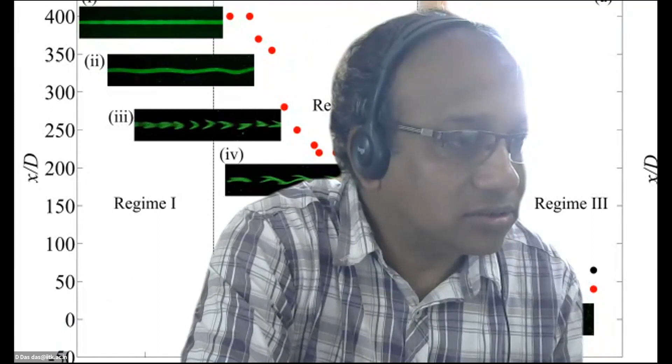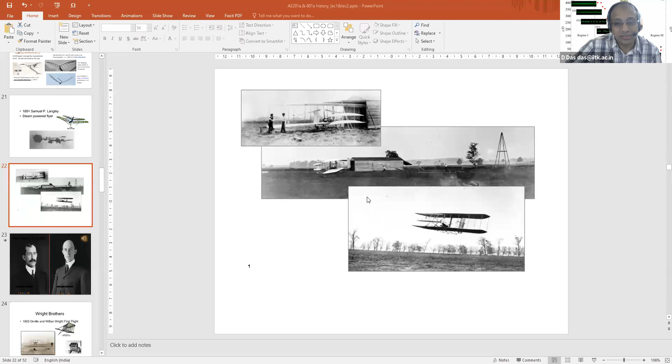Okay, so if you see, they had a cycle shop, and after that they started working on this aircraft. This is the Wright brothers, and we all know they are considered the pioneers in terms of flying with human beings. So the first flight with the engine, with their gliders, is this picture that you see.

But the story behind the Wright brothers is very encouraging, and this is why I tell this story, and this is where I think the motivation should come when you are trying to do something new or challenging. They had just a cycle shop, but they started this design of aircraft based on the theory of Lilienthal and Langley. Before 1800, inviscid theory was developed quite substantially, and based on that you could estimate the lift generated by an aerofoil. They used those theories and developed their first model.

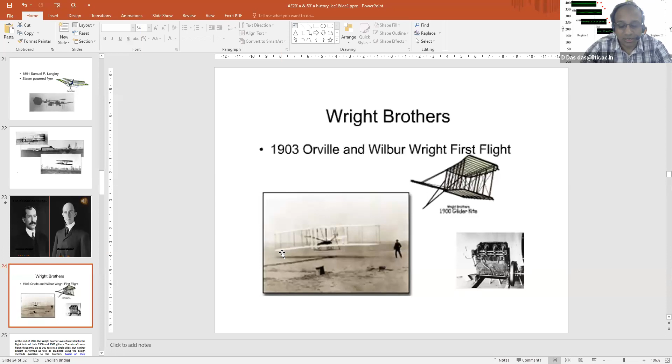And in 1901 they were so frustrated when they did their first flight, and they saw that the actual lift they are getting is one-third of the lift that they predicted using the Lilienthal data. They were so frustrated, they failed in their test. They thought they would fly, but while returning to Dayton, they said that in 1,000 years nobody is going to fly. That is the Wright brothers' statement.

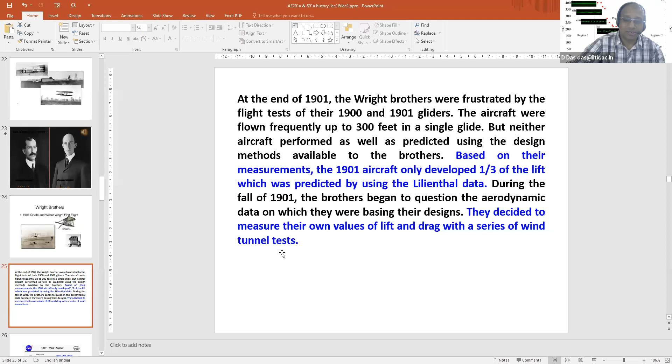So they themselves said in 1901 that in 1,000 years nobody is going to fly, but they did not leave it there. They came back and said, okay, let us find out what is wrong with the model we have made. So they built a wind tunnel — a very elementary wind tunnel compared to today's wind tunnels.

It has a fan and a test section, and you can see that they mount the model using these things. Can somebody guess how many models they tested in one year's time, because they flew successfully after one year?

50. Okay, in one year, 365 days, 50. Anybody? Any other guess? That's a reasonable guess at least. 100. If somebody is very efficient today also, when you make a model and test it, you will see how much time it takes for one model.

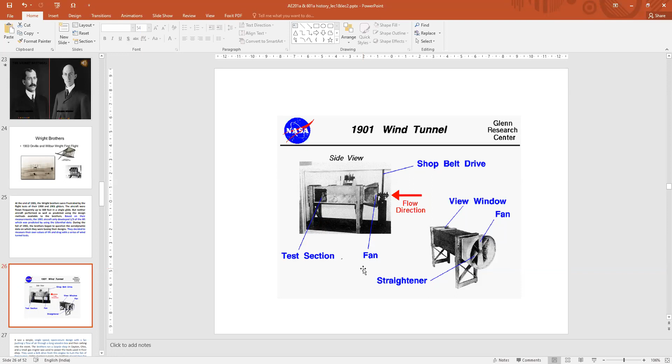So in this period, they made about 200 plus models in 365 days and tested those models, and they figured out what the problem was.

But at that time, in 1901 — today you get all modern instruments, you put the model, you put a force transducer inside it, and it gives you all three components of forces and moments, so you can measure how much lift this wing is generating. That time they did not have this kind of transducer available, nothing available. So what they had was their cycle shop.

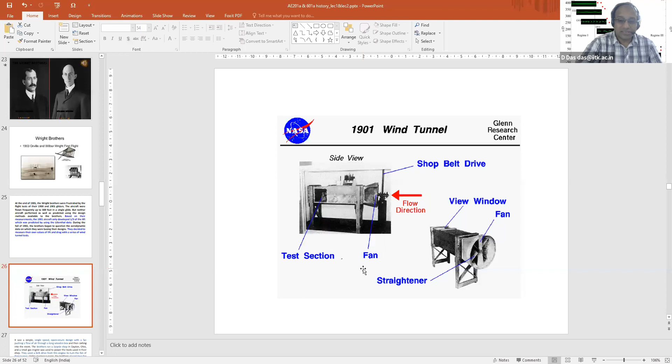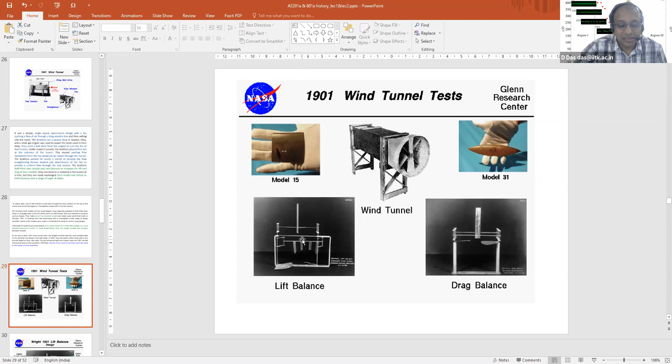So what they did — I'm not going to read this, you can read it later — they created a balance based on this, using cycle spokes and different weights. You have all seen balances in shops; today you see digital balances, but even today if you go to market in the sabjiwalas, you will be using the conventional balance. They created the balance to measure both lift and drag using cycle spokes and other links they created.

This is the balance they used to mount the model, and they measured the lift and drag — you can see there is a dial through which they could measure it. So they created that first, and then tested. Within that one year they tested about 200 models, and figured out what was the problem in their model. Can anybody guess what they figured out was the problem?

You should read a bit of the history of aerospace, because that gives a lot of motivation. In Anderson's book, you will see many historical notes available. And today with Google, you can actually find lots of things that were difficult to find in earlier days when we were students, but today you have a lot of access, so you can read and you will see many interesting stories.

The primary thing they figured out is that the model they were using had a span that was small compared to what they should have taken for the chord of the aerofoil they considered. So they had to increase that aspect ratio, that is length by chord, and they realized that the aspect ratio they were using was not producing sufficient lift. Whereas if they used a longer aspect ratio, they would produce sufficient lift.

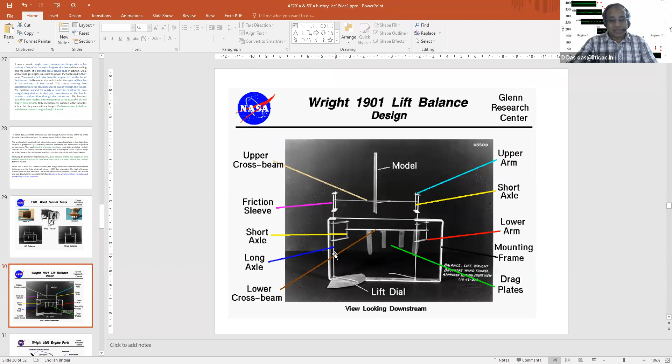And finally, with that, within one year -- after people predicted that for a thousand years nobody was going to fly, because of the effort they had put in and it did not fly -- within one year they could fly their model. So they built the engine and other things, everything. You can go and see the details. This is their flying, and this thing.

So from this story, you understand the failure that they had and the effort they put in. After the failure, if they had just left it and gone back to their cycle shop, that would have been it, but it was still there in their mind, and they built it successfully. That's why they are in history today as the pioneers of the aeroplane, of modern-day aeroplanes.

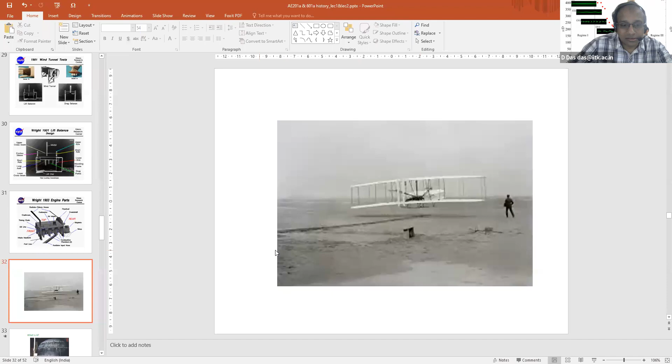Okay, I'll just skip this right now. When we come to other things, we'll talk about it.

Modern day aeroplane looks much different than what the Wright brothers started with. When we talk about this aeroplane, we have to talk about why this wing is there, and how this wing generates the lift and thrust.

To start this, we need some basic background of aerodynamics, and that's what we'll be talking about next. So how many of you have done any course on aerodynamics, or are you doing the aerodynamics course right now?

No sir, this is our first introduction. We are doing a fluids dynamics course. Oh okay, you are doing the fluid ESO 204 course, that is the fluid dynamics course. Yes sir, okay, okay, yes. So right now you are doing the fluid dynamics course.

So I am sure some of this introduction that I am going to talk about today, because I am not going to talk in very detail, is just related to fluid dynamics. And once we do that, then...

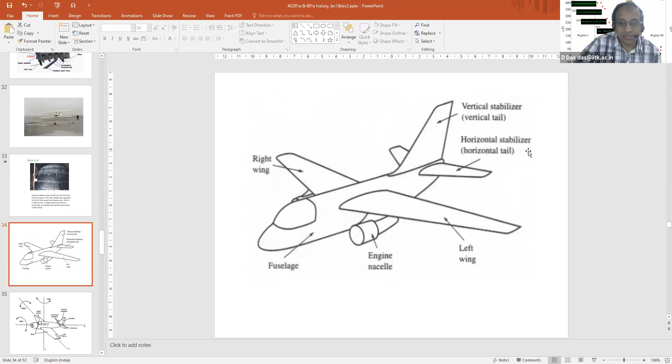What are these forces, how are these forces generated. There is a pitching motion, rolling motion, and yawing motion. So the aircraft can roll with respect to this axis. It can pitch, nose down and nose up, that is the pitching motion. And it can also rotate in a horizontal plane, that's the yawing motion.

Then how wings and different control surfaces generate forces. All these things will be clearer once you have some fluid dynamics background, which I don't know how much is covered. So I will quickly go through some background so I can explain all this in detail. So today's class will continue with that background.

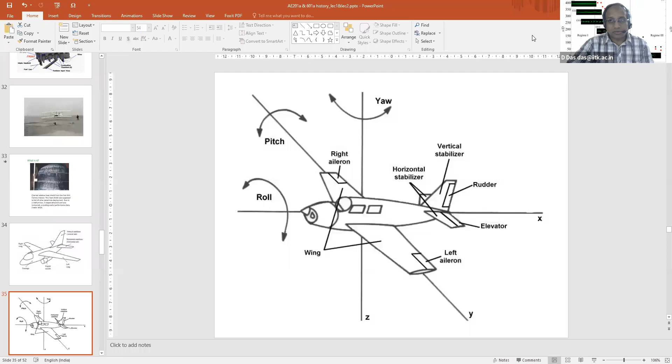I'm sure when we are talking about aerodynamics or fluid dynamics, we need to talk about what is fluid and how do you define this. Because if I start looking at air as a gas, you may think we should start analyzing this using each molecule of the gas, at the molecular level.

Now, I think the first thing we should understand is how do you define a fluid particle, in the sense when you are saying velocity at a point, or pressure at a point on any surface, what does it mean? Or when you talk about density at a point - because we are aerodynamics people, we have to think about density-changing flow also, because at very high speed, high Mach numbers, density variations become important. So we need to define what is continuum and how we define a fluid particle.

So to do that - this has probably already been discussed in the fluid dynamics course. And if you... Yes sir, yes sir. Okay, so if it has been discussed, then I will discuss it very briefly and quickly.

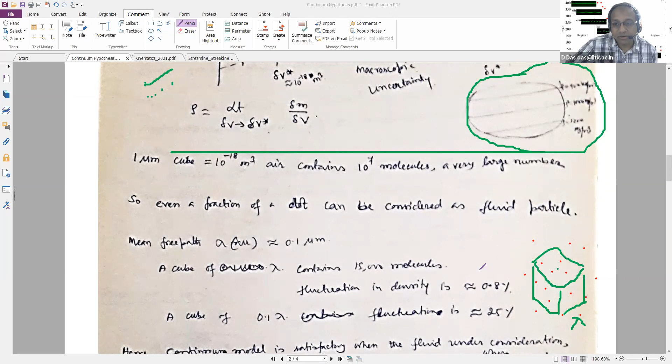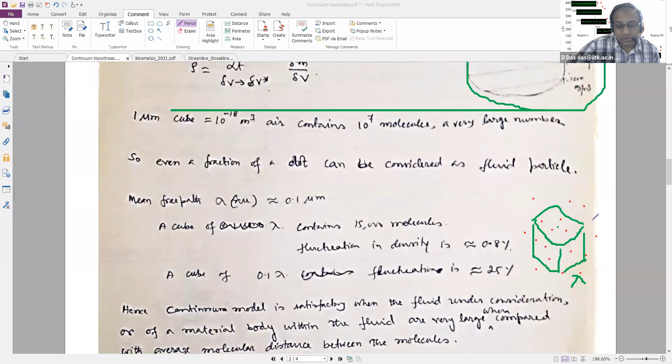So if we now start thinking of the probability of number of molecules present in any of these volumes we are considering, the probability that the number of molecules present in this, or coming in and going out from this volume, that is what will determine how many molecules are present here. So if I take a lambda cube, the probability of the number of molecules going out of this volume and the number coming inside this volume is almost the same. And as a result, this lambda cube is actually your delta V star. Your delta V star is not this, delta V star is lambda cube.

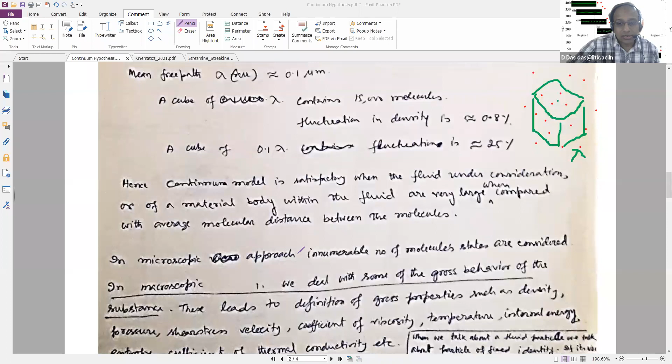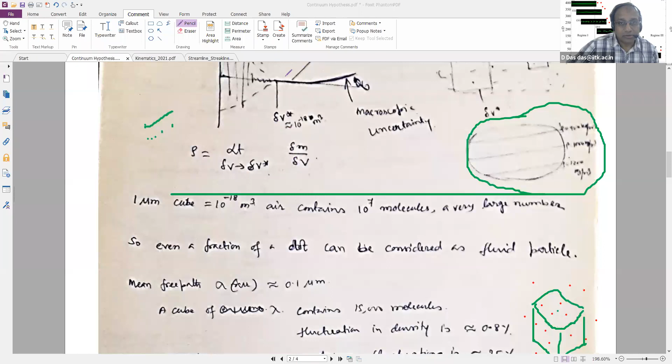That is what is important, this is the minimum volume that if you consider, then you will be in the macroscopic zone. So with this macroscopic zone, now we have defined a small volume which is lambda cube, or maybe more than lambda cube, but it is still sufficiently small so that I can take a tip of a pen or tip of a point, and I can say that I can define all the fluid properties there in the macroscopic sense. So the entire analysis that we do, most of these studies in our aerospace, is in the macroscopic zone.

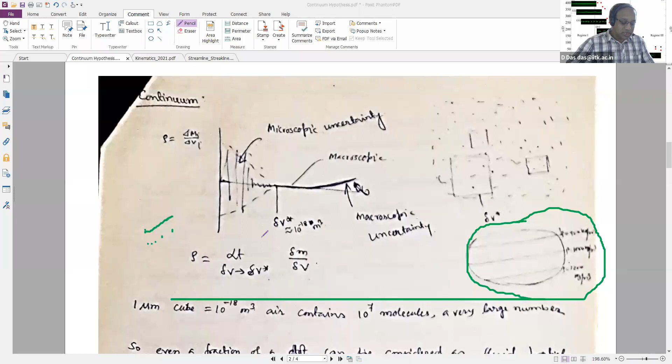But if you go to the outer atmosphere or upper atmosphere where the air is very thin, your spacecraft dimension may be of the order of the mean free path. In that case, you have to do molecular simulation, not in the macroscopic sense, whatever we do. So in that case, you have to use either kinetic theory of gas or molecular level simulation to understand what is happening in the flow.

But once we are in the macroscopic region, delta V star is still sufficiently small. So I can take one point and an adjacent point - this is a large view - and I can define the properties at every point in this space, and join them into a continuous function like this. I can say this property rho is a function of space, as well as it can be a function of time at any point. That is why we can apply the properties of continuous function in the continuum model.

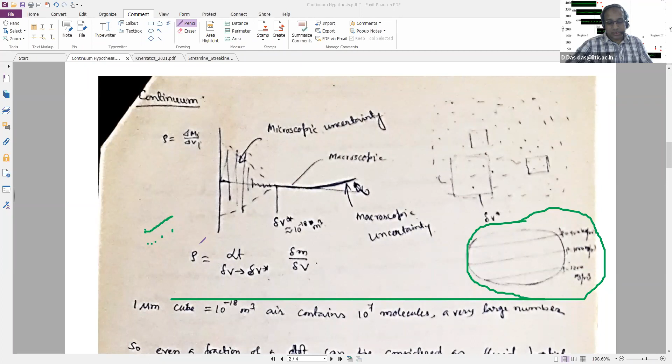And this is what we will be doing in the entire macroscopic analysis - using these properties of continuous function, and that's why we call it continuum. Similarly, we can define the velocity of a fluid particle, so velocity will be defined as momentum by mass.

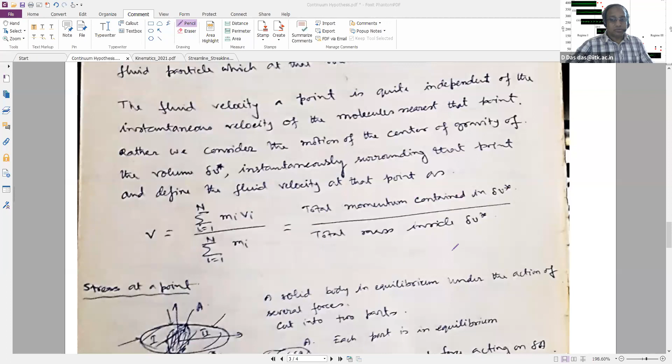So total momentum of the molecules contained in delta V star, by total mass of the molecules present in that volume, we can define stress similarly.

Stress is defined as force per unit area. So you can define delta F by delta A, where delta A tends to delta A star, is defined as a stress.

In fluid, in aerodynamics or fluid dynamics, whenever we are talking about stress, usually we decompose into two components: one normal to the surface, and another tangential to the surface. So tangential stress is tau, and normal stress, when we write it, we write it as sigma, usually, or sigma n, whatever.

The direction of that normal stress is always the outward normal to the surface, because any surface or area is actually a vector. It has a magnitude and a direction, and the direction of that area is its outward normal. So normal stress will be outward normal, and normal to the surface.

But whenever we say pressure, pressure is actually opposite to the normal stress. It is inward to the surface. So this nomenclature you should be familiar with: pressure always acts toward the surface. The convention for stress is that it acts normal to the surface for the normal component, and tangential will be in the tangential direction.

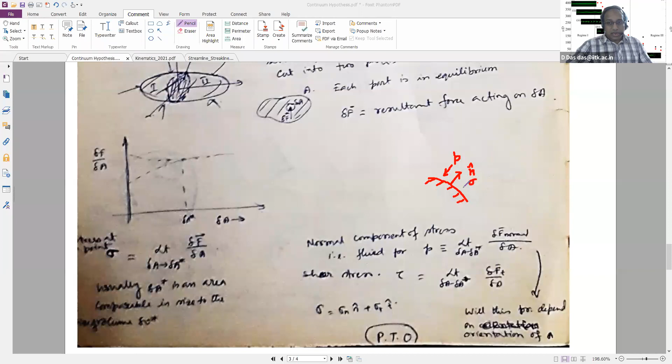Now we have to also define fluid, and you can define fluid how? Air is also a fluid, remember. Air, all liquids and gases are considered fluid. So if I consider a solid object, let's say in class I would have taken a chalk...

and if I twisted it, applied a torque, it would have some internal strain or deformation, and then reach an equilibrium position depending on the torque. If it were a chalk, and I increased the torque, at some point it would have yielded, then ruptured, the chalk would break.

But up to a certain torque it will withstand, and when withstanding this torque, it reaches another equilibrium by developing some internal strain, because the torque is applied, and stress is proportional to strain, as we know in the case of a solid.

The difference between solid and fluid is this: let's say I have this arrangement. This is a rotating drum on a table which is rotating at some RPM, and this is a fixed cylinder immersed into it. Now when I rotate it, what will happen?

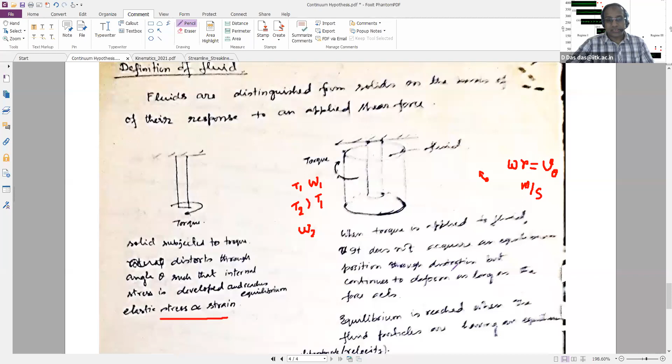So under shear, it will start deforming and reach an equilibrium state such that the rate of strain is proportional to stress. That's the difference between fluid and solid, where rate of deformation is important in a fluid.

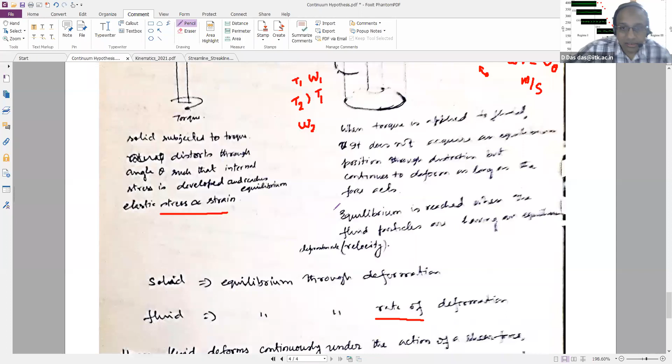So in this fluid mechanics course, you will learn that stress is proportional to strain in a solid, while in a fluid it is proportional to strain rate. So today we have defined a fluid particle, and we have defined what fluid is.

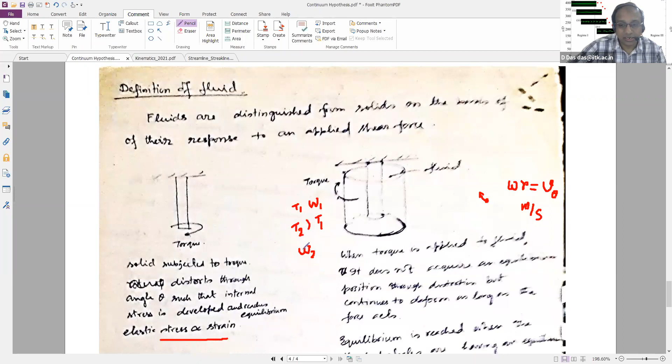in comparison with what is solid, and we have said what is fluid. So otherwise we say fluid is any gas or liquid, but in terms of the property, in terms of stress and strain, you see a stress-strain rate equilibrium in the case of a fluid.

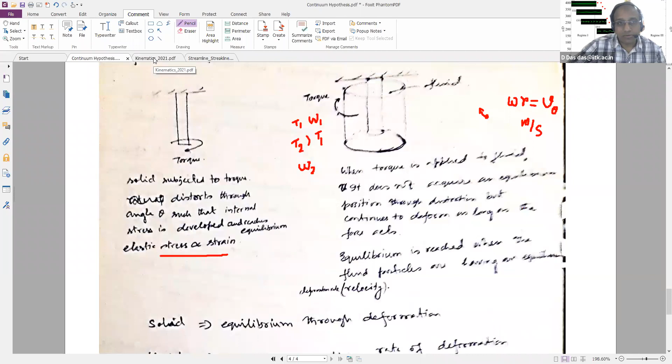Okay, so now once we know fluid, let me just quickly talk about kinematics. So can somebody tell me what is the difference between kinematics and dynamics?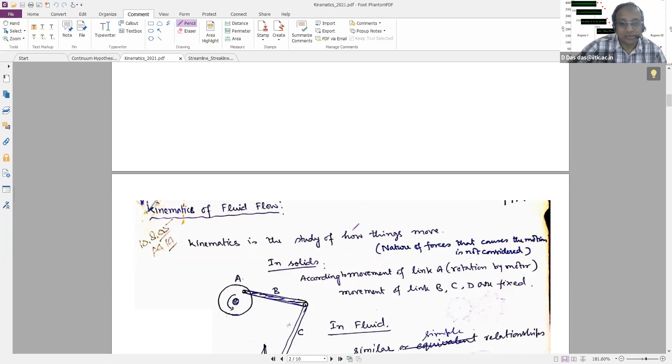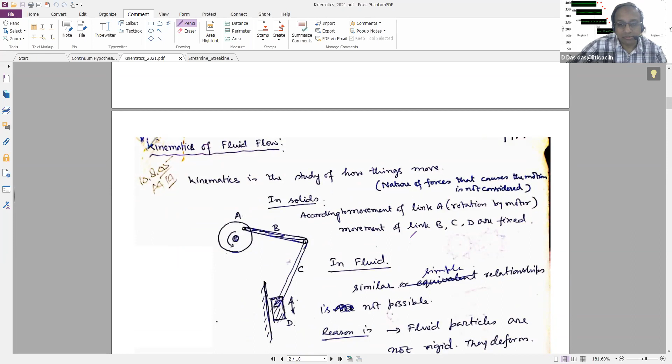Dynamics studies the cause of motion, while kinematics studies motion itself. Kinematics is the study of how things move, the study of motion. When we try to answer why it is moving, the nature of forces causing the motion, then it is dynamics. So kinematics means we are talking about displacement, velocity, acceleration - these are motion related quantities. Whereas dynamics means the force that is acting, force equals mass into acceleration - that is dynamics.

I'll go through this very quickly. When you consider solids, this probably has been taught. If I consider this slider crank mechanism and rotate this wheel with some motor, depending on these links, I will get an amplitude and frequency. The frequency will be similar to the rotational frequency of the motor, and I can generate a sliding oscillating block D using this mechanism. How much this oscillates depends on the link lengths, and the frequency of oscillation depends on the rotational frequency. So we can determine this very easily.

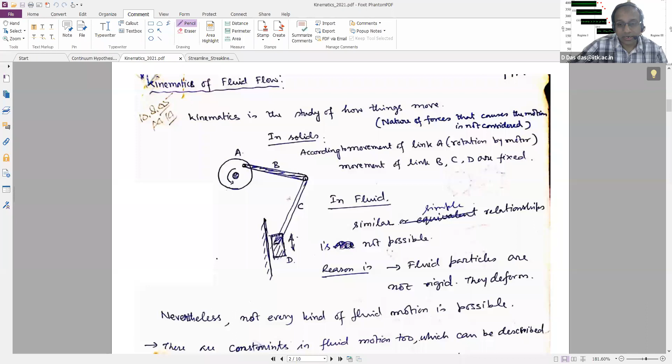In case of fluid, can we do a similar thing? We cannot, because even if I consider a series of particles and think this is a link and that is a link, at any moment the fluid particles are constantly deforming. Hence such simple solid motion will not be possible, because fluid particles are not rigid, they deform. So what happens in case of fluid motion?

Let's take a very simple example - water in a drum flowing through an exit. Now, if I take a chain of fluid particles along this line, I might argue this fluid particle moves this much distance over time, and in the same time this other fluid particle will also move this much distance. Does it happen that way? No, that will not happen. If it were a thread, then obviously however much the thread moves here, the same amount of thread will move there. But for fluid, it does not happen that way, similar to solids.

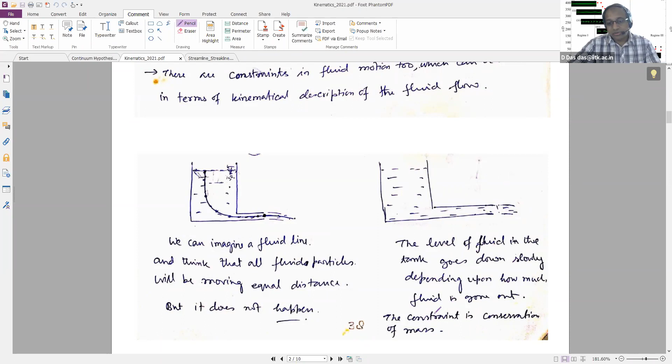But what will happen? There is also some constraint there. What is the constraint here? The constraint is the amount of mass that is going out - the same amount of mass will be such that this volume will decrease by the same amount. So if the density is constant, the amount of fluid going out, the volume of fluid - the same volume - the height will come down such that this volume and that volume are the same, which is nothing but conservation of mass. So that is the constraint, conservation of mass, that is doing a similar thing here.

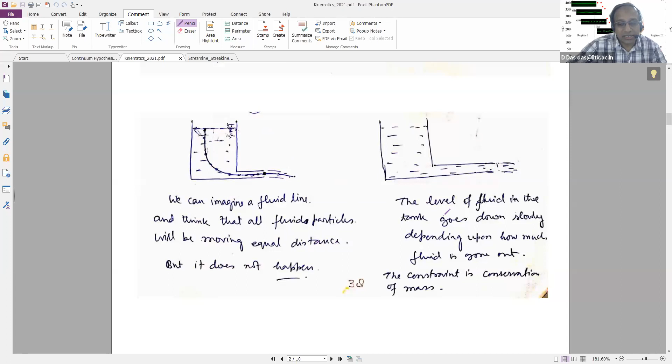So you can see that kinematics, when talking about fluid versus solid, fluid is much more difficult, because we cannot consider each fluid particle so easily. Then there comes the Lagrangian or Eulerian description of fluid motion. This has been taught already, but some of you may not have taken that fluid mechanics course, so let me quickly discuss that today before I end.

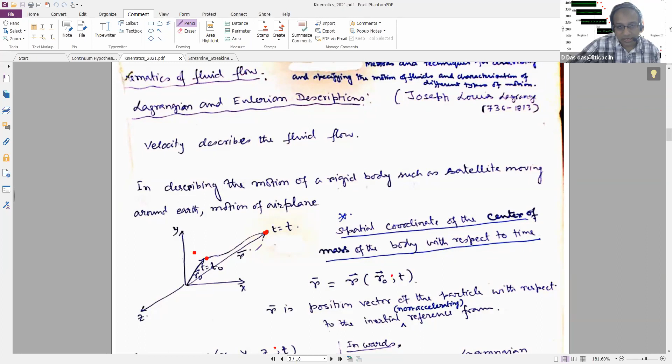What is the Lagrangian description of fluid motion? In the Lagrangian description, you are describing the motion of a rigid body - like a satellite moving around the earth, or the motion of an airplane - with respect to a fixed reference frame. So if I take this with respect to the reference frame, let's say this is one particle, and I identify that particle by its initial position R0, and track this particle as it moves with time. So at t equal to t0, it is at R0, and at another time t, it is at R. So I can define R for this identified particle.

Remember, this is not a variable like t, this is just an identifier. That's why I have used this semicolon.

So this identifier indicates that I have identified this particle, and its position I can track with time as R equals R of R0, t. R is the position vector, because as soon as we are talking about position with respect to this reference frame, it has a direction, so I can call it a position vector. This position vector of the particle is with respect to this fixed frame of reference, or the inertial frame of reference.

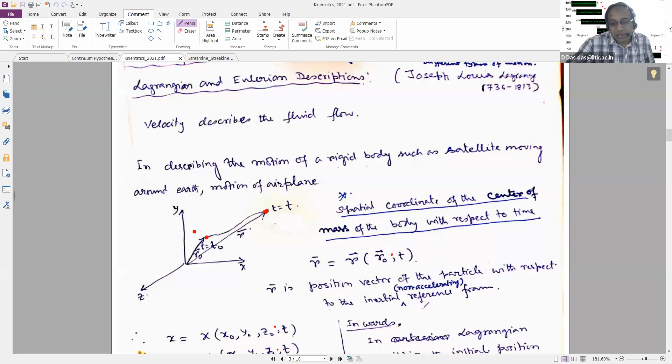Inertial frame and non-inertial frame, all of you are familiar with. A non-inertial frame example will be an accelerating frame of reference, and for aerospace, non-inertial frames are very important. In fluid dynamics equations derived in the ESO course, and in our aerodynamics 1 course, these will be derived. Because if you see helicopter motion, or flapping wing motion, or an accelerating rocket, those are not inertial frames. These are non-inertial frames of reference.

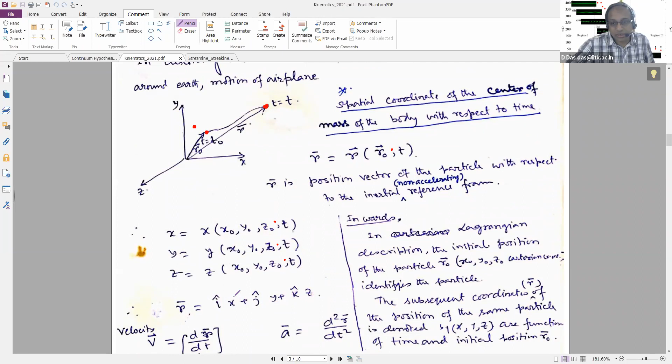In Cartesian coordinates, this will be x, y, z. So x0, y0, z0 corresponds to R0, and we write this as a function of t. So R as a position vector with respect to this coordinate system, you can write as x i, y j, z k. i, j, k are unit vectors along x, y, z direction. And we can write velocity equal to dr/dt, and acceleration equal to dv/dt or d2r/dt2.

So position R, velocity, acceleration, all I can determine in this Lagrangian sense of description, where I can identify a fluid particle and find its velocity and acceleration easily. If it would have been dynamics, then you would look into force equal to mass into acceleration, which we are not considering in this kinematic analysis, because we are doing a kinematic analysis.

Now, alternately, if you consider the flow past this aircraft, and if you have to identify each of these particles' motions and then their dynamics, it would be an enormous job, because you have seen the dimension of the fluid particles, and identifying all of them and their motions, and linking that with what forces or pressure are generated over the surfaces and all these things.

Why are forces and pressure important? Obviously forces are important for our flying vehicle because we need to generate sufficient lift, the vertical force. And when it is flying, our engines should generate sufficient thrust to overcome this drag. So forces are important, and pressures are important.

Why? Because you have made this body with some structure, and somewhere the pressure is so large that the material with which you have made it, it cracks. Then it is a problem. So the pressures, the stresses acting on the body, are also important.

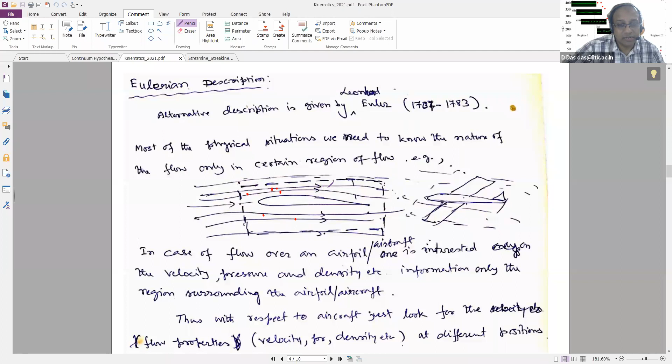So in our zone of interest, over the aerofoil—this is the cross section of this aerofoil wing, we will be talking about this aerofoil later—I identify my zone of interest, and at every point I find the variation of the property with time. So that means, in this case, the velocity, if it's the property, is also varying with space and it is also varying with time.

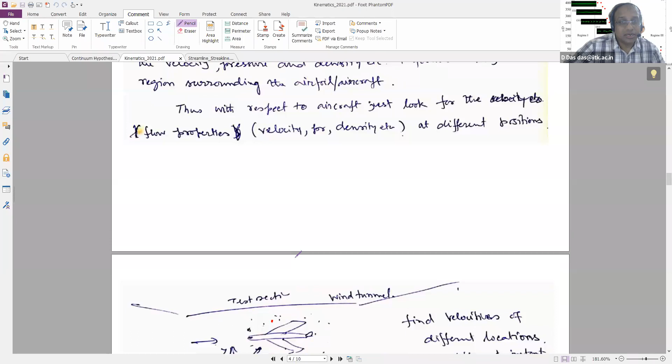However, at this point in space, whatever fluid particle is occupying it, at the next instant of time, in the same space, the same fluid particle is not there. That fluid particle might have moved here, and another fluid particle might have come here.

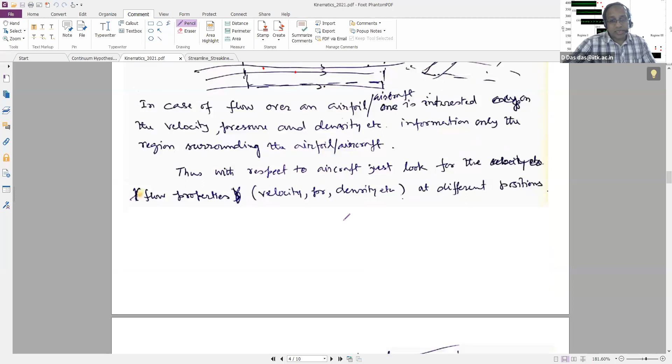As a result, when you describe the flow using Eulerian description, you cannot straight away use force equal to mass into acceleration, because when you write force equal to mass into acceleration, this is the mass of the identified fluid particle, or identified body. So if the fluid particle has gone from here, we are talking about the acceleration at this particular point. That's why we need to find out the relation between this Lagrangian and Eulerian description.

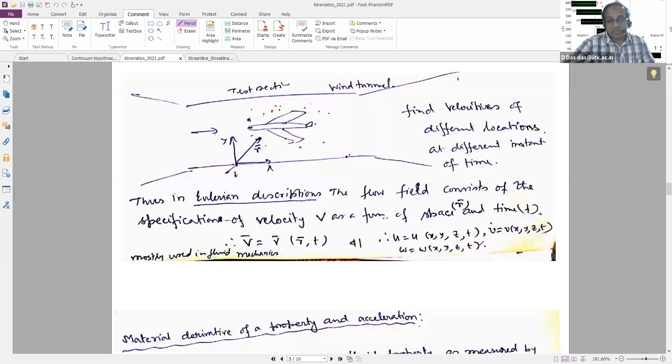In the Eulerian approach, we defined u as a function of x, y, z and time. It is not an identifier anymore, it is just a function of x, y, z and time. So let us consider how to link the Lagrangian and Eulerian descriptions quickly.

We have 2 minutes. Let's take a particle at density rho, and it has moved at time delta t, and its density is now rho plus d rho. So what will be its change in density, d rho dt? D rho dt will be rho plus delta rho minus rho, by delta t, isn't it?

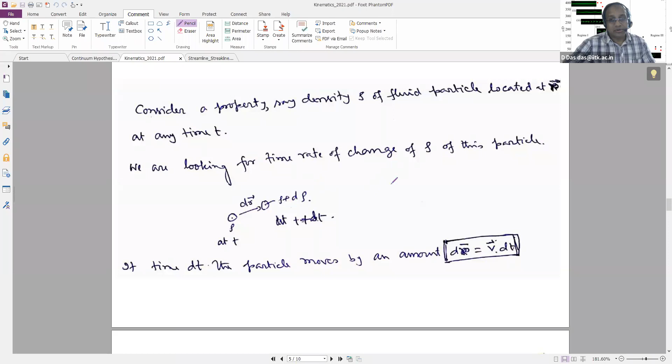So d rho is the density change in the Lagrangian sense, and d rho dt will be the Lagrangian derivative of this particle. But now I have defined rho as a function of x, y, z and t, and that particle identification is not there. So we use the chain rule of partial differentiation: d rho equals del rho del x dx, del rho del y dy, del rho del z dz, and del rho del t dt. This is just for any function f(x,y,z,t), we can write this chain rule. All of you are familiar with it from your maths courses.

And this term I can write as a dot product of two vectors, because this dot product gives me del rho del x dx, del rho del y dy, and del rho del z dz. And I have del rho del t dt, which is a function of x, y, z.

So what is the meaning of del rho del t? By definition of partial differentiation, this means we are keeping x, y, z constant, so we are looking at the density variation at this particular location with time. We are not moving with the particle like in the Lagrangian sense. So this is the local rate of change of density with time.

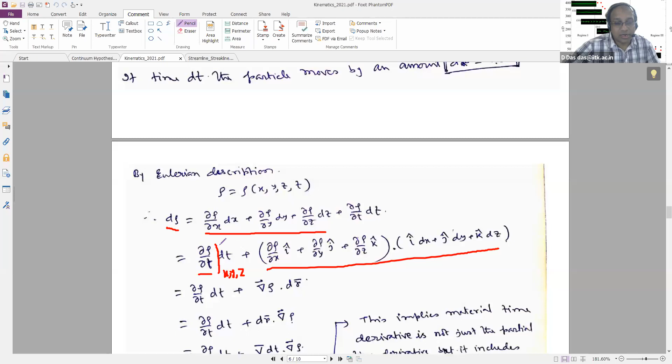And this can be written as del rho dotted with dr, where dr is v dt. So I can write d rho equals del rho del t plus v dot del rho, times dt. Now take dt to the other side.

So d rho dt in the Lagrangian sense, the material rate of change of density when you are following the fluid particle, is the material derivative. This is equal to, in the Eulerian sense, the local rate of change of density plus the convective rate of change of density, due to variation in density with space, as fluid particles come and go from that location.

So now, if I write this for velocity, it becomes dv dt, where velocity is a vector, that equals your acceleration. And force equals mass into this acceleration, which should be equal to mass into del v del t plus v dot del v.

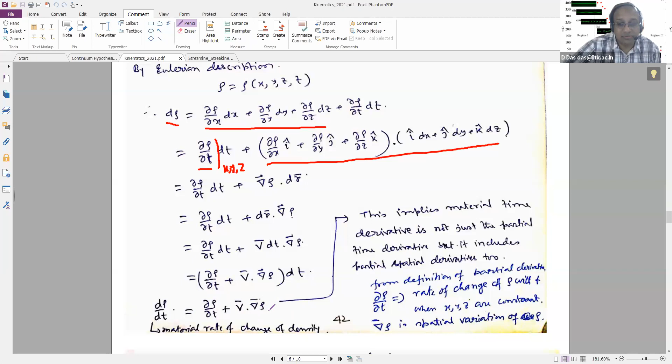So this operator is also called the total derivative.

Student: Sir, does del rho del t mean that the particle is increasing its size by itself, something increasing its size with time? Instructor: del rho del t is not about particle size, it is about the property density changing with time. That means in a fixed identified space, the density, the fluid might be expanding or compressing there.

So if it is expanding - for example, if you take a high pressure gas, put it in a balloon and leave it, it will expand - then the density will be changing. That means locally there is a change in density.

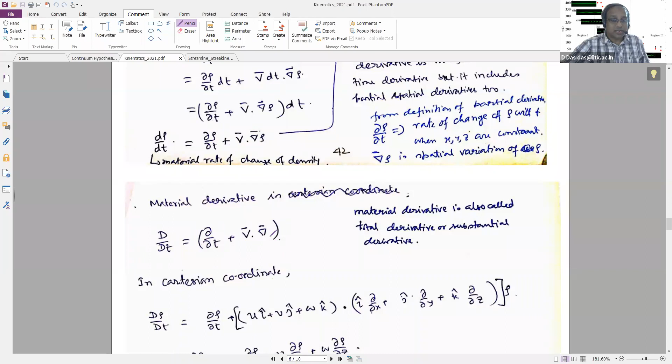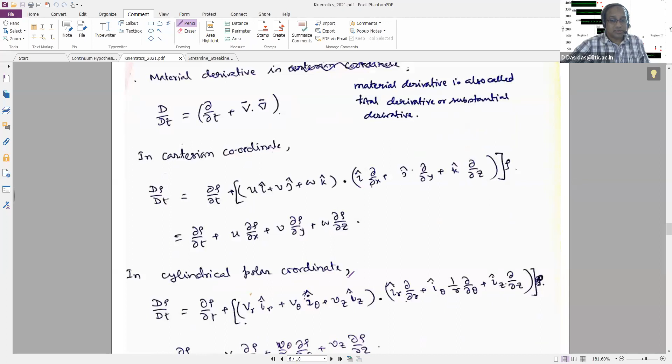So this is also called the total derivative, and in operator sense, if I write del del t plus v dot del, that is the total derivative operator. We wrote d rho dt in this fashion for Cartesian coordinates; you can also write this in cylindrical coordinates, and you can see the differences between them.

But when we talk about the acceleration of a fluid particle, it is the total derivative dv dt, which equals del v del t plus v dot del v. So when we write force equals mass into acceleration, it is mass into this acceleration, or mass per unit volume.

If I take rho into dv/dt, this will be rho into this quantity, and that will be equal to summation of all the forces. That is the primary governing equation we will see in dynamics, and you will see it in the fluid dynamics course.

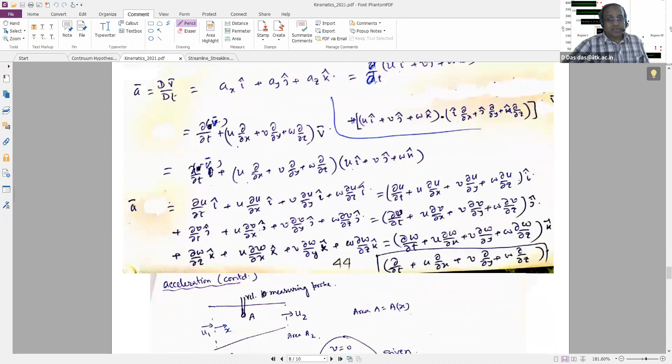So if you write it in Cartesian coordinates, you will see this, and I think we are about out of time, so I can take a few questions and stop right now.

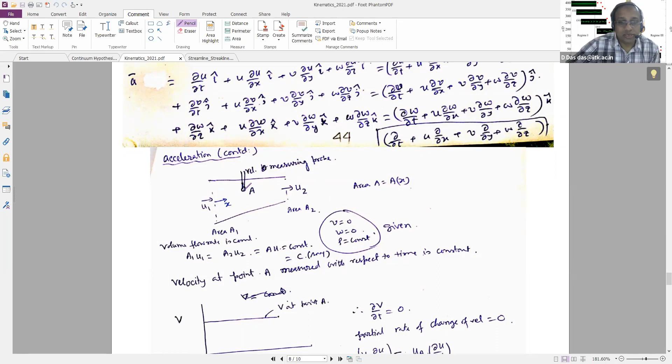I put a measuring probe here and measure velocity at point A. It is a steady flow, so there is no change in velocity u1 and u2 with time. So there will be no change in velocity at A with time. So if my measured velocity v at A looks like this with time, does it mean that there is no acceleration of this fluid particle?

It depends on area. So now area is decreasing. If area is decreasing, we know that u1 increases to u2, velocity has increased. So that means if the velocity is increasing, there has to be acceleration. Otherwise, how did velocity increase? So the fluid particle, as it moves from here to here, the velocity is increasing, meaning the fluid particle is accelerating.

However, with time, if I measure at a point, I will not catch this acceleration, because what you are measuring is del v del t. That means velocity at a fixed location, xyz, is constant there. However, the acceleration will correspond to the other term, that is u del u del x, v del u del y, w del u del z.

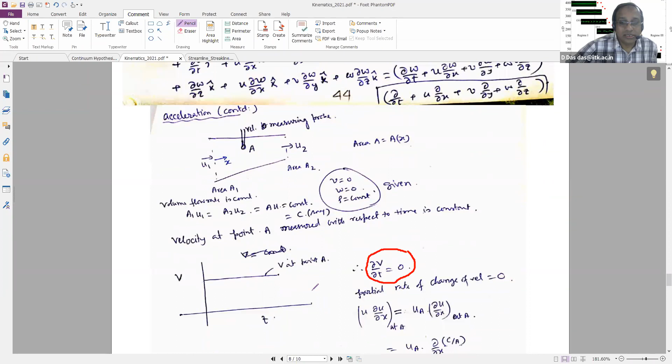Here it is only one directional flow, so only u velocity is there. So you will have u del u del x at A. If you calculate with respect to this, it will depend on this area, since u into A is constant. So based on that, you will find it depends on how area is changing with x. This area change is creating a spatial rate of change in velocity at different points, and that is what will be the acceleration of the fluid particle here.

Okay, so with this I stop here, unless you have a question.

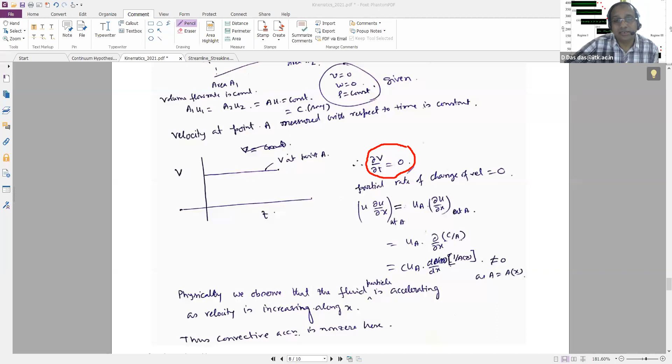I see a question: conductive acceleration? No, it is not conductive acceleration, it is called convective acceleration. Conduction, when you use that term, is in heat transfer, related to conduction in a stationary medium. If you take a rod, one end is heated and connected with the heated body, heat will flow in that direction as conduction. But if you allow air to flow over this, then heat will also transfer from the body, and that will be convection.

So this is called convective acceleration. Because of the motion, the fluid particles are not at the same position, they are moving away. So because of the motion, this acceleration is seen, that's why it's called convective acceleration, or convective rate of change of that property.

With this introduction, I will do a little more so I can discuss some of the things we are going to talk about, how the forces are generated, and more about the forces generated on the wings of an aircraft and all these things. If you have any question, you can ask, otherwise I can stop here.